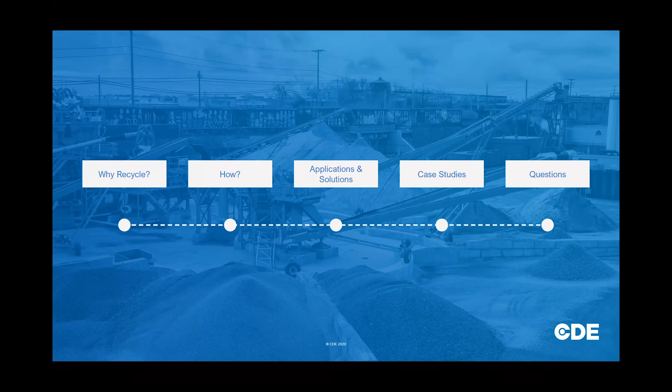So how can we turn this waste into a resource? We need to collect it in a proper way, process it in a proper way, and then serve the industry, which is the construction and building industry at the end of the day. So we need to develop a circular economy model, in which we collect the waste, process it, and it can be reused for construction and building purposes.

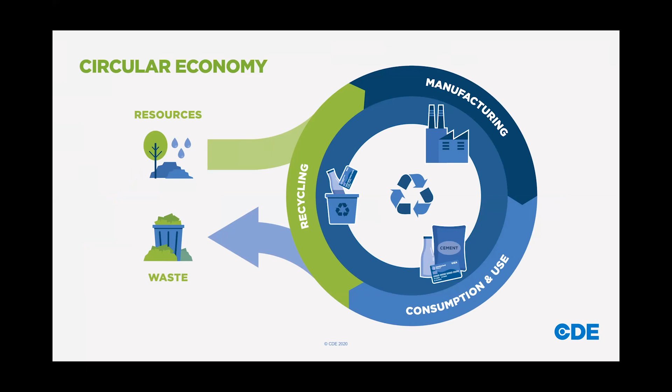I want to give you some information regarding the sand consumption level of the Earth. 50 billion tons of sand is used every year. That's a very high number, and sand can be considered the main raw material for construction purposes. Projections for 2060 show it can reach up to 83 billion tons per year, approximately 60–70% more than at the moment. So that's a big consumption level.

I also wanted to show you some photographs, because most of you in your daily life come across these kinds of piles, especially on the roads or the outskirts of cities. Usually this waste material consists of soil, concrete, pebbles, or plastics, wood, chips, this kind of stuff. But this material is very good for construction and building purposes again, after processing it in a proper way. So it can be literally everything.

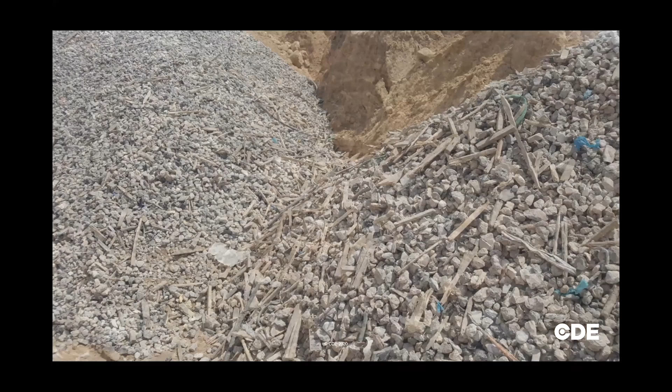Another number, just to show you the importance of sand: illegal sand extraction or illegal sand mining is number 3 on the transnational crime list, only after drug trafficking. And the market is worth approximately $200 billion.

This graph tells us that we have a lot to do in terms of recycling aggregates and sand, because the recycling ratio of the countries, as you can see, is not more than 10%, and we can do something to improve this number, of course. That's a very low value at the moment.

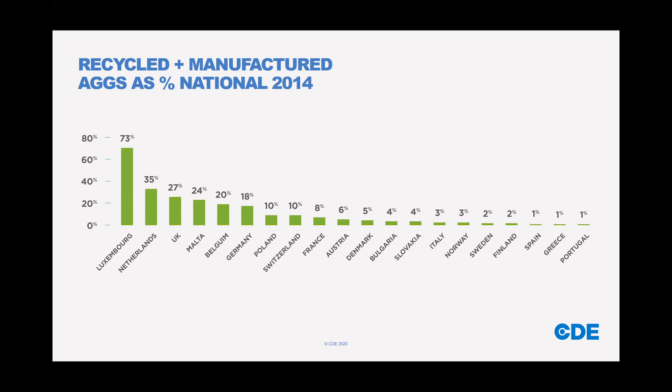So how can we recycle? There are some unique challenges which can be considered as unique opportunities at the moment. First of all, there are rigorous standards for construction materials nowadays, and they are increasing day by day. Even if you are producing virgin materials from the quarries, it can be out of spec. In most countries, there is sometimes a shortage of sand or aggregate. So diminishing resources is going to be the next challenge.

And byproducts and unusable materials are another challenge. Limited access to water, especially for Middle East countries, is another challenge. And remote locations are another challenge. When we say remote locations, for example, most of the ready mix or concrete is being used in the cities, in the construction works ongoing in the cities, of course. But when you consider the quarries, they are usually far away from the point of consumption. And this brings us another concern, like transportation cost, of course. And energy efficiency is always a concern.

As usual, there is a traditional way of processing this construction and demolition waste. We call it C&D waste. And when you use the traditional way, it is going to give you a low value and low standard product at the end of the day, which means you will lower the brand value of the recycled aggregate, you will lower the consumer or client perception, and you will lower the attractiveness of the recycled aggregate business.

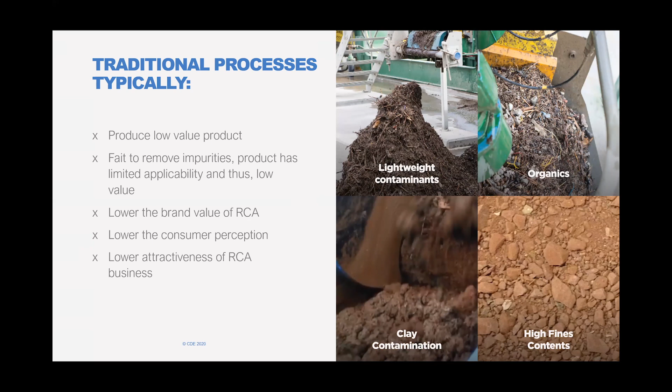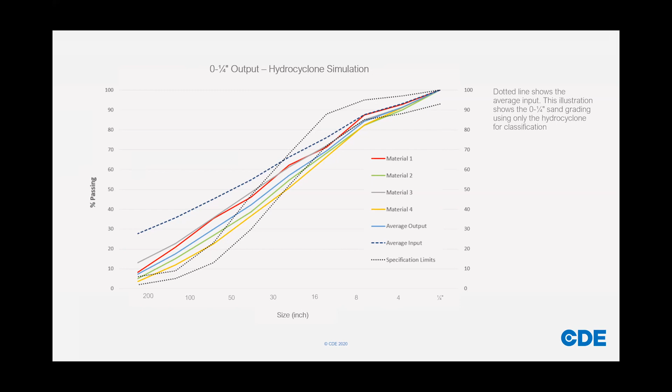The dotted lines illustrate the maximum and minimum allowable limits for construction material to be used in ready mix applications. As you can see, our examples selected here are out of spec at the moment. To get them into spec, we need to play with the physical characteristics of the materials, like proper sizing and proper classification methods, which need to be done by cyclones, some CFCU technologies, or scrubbing applications. After processing, we can get them into spec, of course.

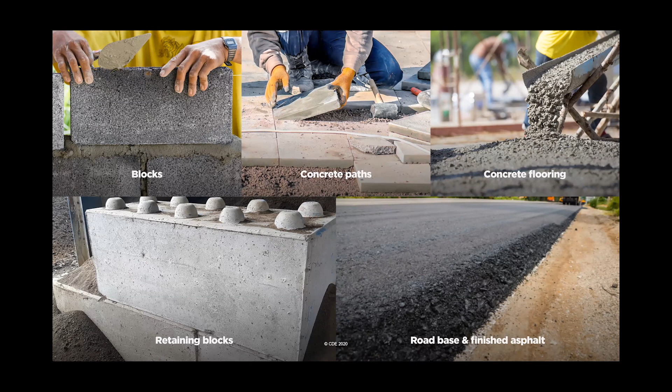So, applications and solutions. There is a nice figure here which I want to mention. 75% of the concrete being used in the world at the moment is non-structural. And most importantly, 50% of it is less than 3,500 PSI. So there is usually no need for high quality virgin aggregate in these applications. So what can we do with recycled aggregates? We can manufacture blocks. We can use it in concrete paths, concrete flooring, retaining blocks, some road base and asphalt applications, sometimes pipe bedding, or as drainage stone, of course.

There is a nice example in the UK which our company has accomplished, Sheehan's plant. Sheehan's is very close to Oxford, and they are achieving 1,890 PSI strength with recycled aggregates from the CDE plant. But the UK building block strength requirement is only approximately 1,000 PSI. So they're already exceeding the requirement by 80 to 90% at the moment. And their block production facility follows a CE certified process.

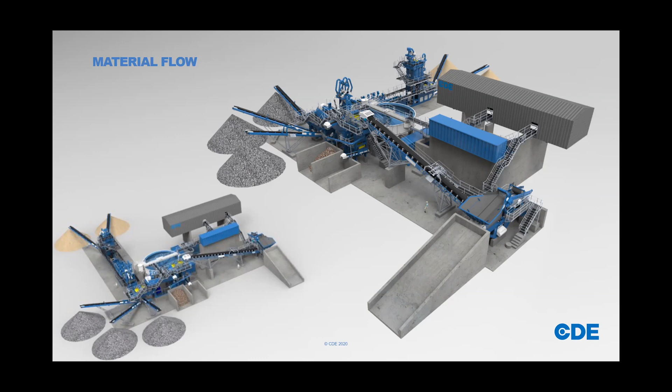So this is the core of the plant, which is a log washer. We call it AggMax. Its duty is to size and de-agglomerate highly organic contamination or clay lumps in the product or in the raw feed.

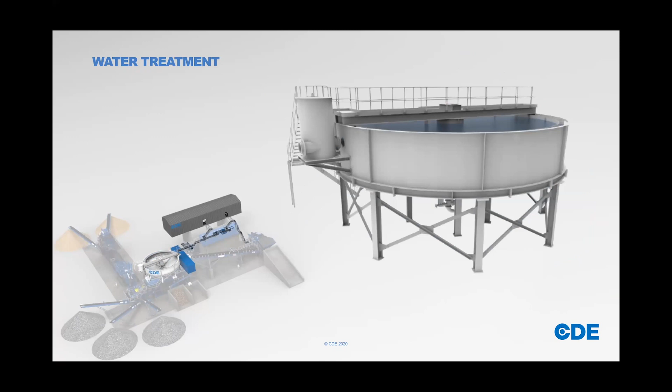Then the attrition cells or CFCU technology can also be integrated into the total process to get a better, high quality product. CFCU technology is a kind of upward current water process, and it is to remove the lightweight plastics or organics, lightweight material usually, and then you will have a high quality product at the end. The water treatment plant helps us to recycle and reuse the total water being used in the process, as I explained before.

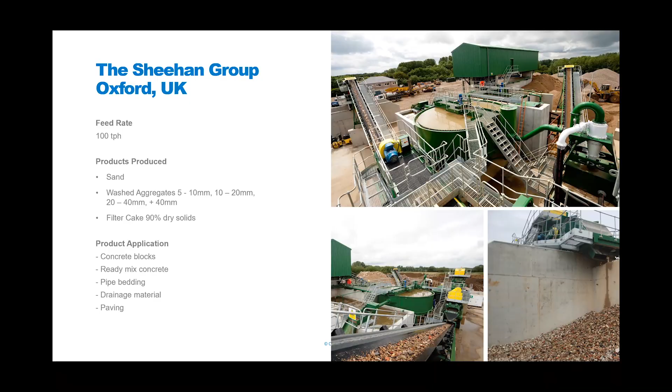So I want to show you some case studies, and there will be some short videos again. I may jump only one of them, but the videos are usually self-explanatory. The Sheehan's group, as we referred to in the presentation two or three pages back, and this is the plant. The capacity of the plant is approximately 100 tons per hour at the moment, and they are manufacturing sand and aggregate fractions as listed over here. And there is a nice video explaining it. Let's play it.

Thank you for your presentation, Anders Özel. Do you have any questions? Yeah, sorry. Our Lunguleasa and Spirchez is not here now, so we can continue with Asan. Hello to everyone. I can't hear your voice. Hello. Yes. Your presentation is finished? The presentation is almost finished, but there are only three case studies. That's all. Okay, thank you. If you want to jump to the question section, I'm okay with it. No problem. Would you like me to play the video or not? Can you see the video when I play it? Okay, I see. You can play. Okay, then let me give the examples to you instead of playing the video.

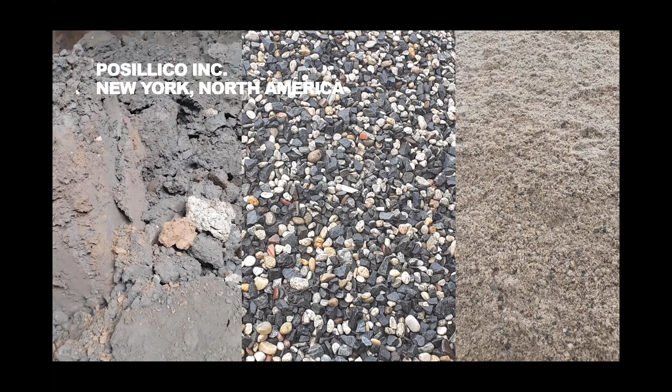So on the left-hand side, this material is from America. You can see the excavation waste coming most of the time from tunneling applications in New York. And in the middle and on the right-hand side, you can see the products. And there is a huge difference, of course. So that's the plant which is doing the job at the moment in New York, and they're manufacturing 270 tons per hour and producing 3 types of aggregates plus 1 grade of sand.

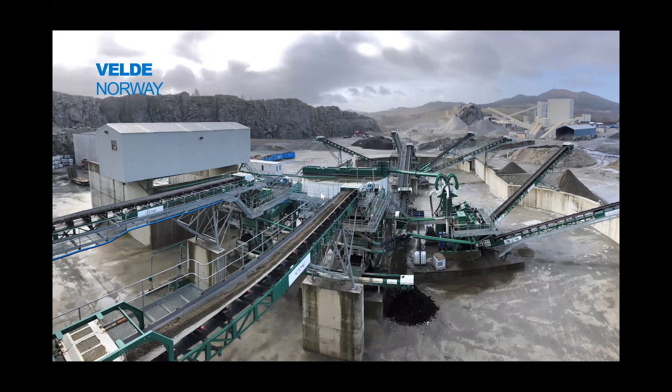Jumping the video again, and this is the Velde, Norway plant. This is the biggest C&D waste plant in the world, and its capacity is reaching up to 300 tons per hour. And again, manufacturing 4 types of aggregates and 2 grades of sands. So let's play this video at least, and then it will be finished, okay? Okay.

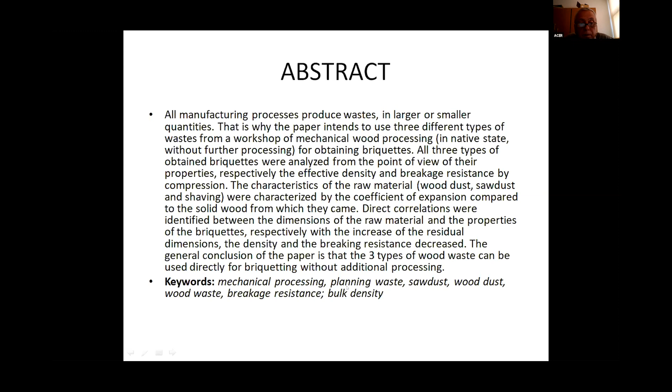As an introduction about biomass, biomass is a renewable energy source because it never ends if the processes are sustainable. In this sense, in favorable conditions, a new tree will grow, other garbage will always be obtained, and waste will be present at any raw material processing.

There are 5 different types of biomass: wood and agricultural products, solid waste of garbage, landfill gas, biogas, ethanol, and biodiesel. Among wood products, we can mention firewood, chopped wood chips, bark, sawdust, dust in native form or processed.

In the same chapter, we have a balance of wood material and waste from a furniture factory. We can see that in this factory you can use spruce timber, beech timber, plywood, chipboard, veneer for exterior, veneer for interior, timber for packing, and so on, with some quantity.

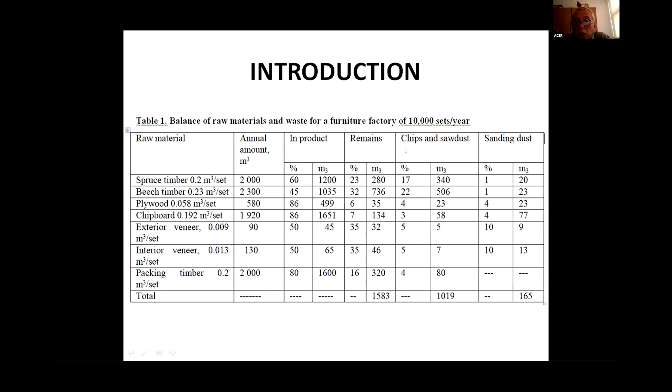A part of this raw material is retained inside the furniture product, and the rest is in the form of remains or waste with different quantities, small or large chops, chips, sawdust and sanding dust.

Some references about wood waste. The waste was evaluated by some authors, who explained that during wood processing about 7 to 50% of the wooden raw material becomes residue, but the cost of this waste valorization represents only up to 8% of the turnover.

Another author discussed the environmental aspect of using this renewable and biodegradable wooden material. They want to find alternative sources of secondary wood waste in order to use them in wood composites. Other authors use the wood waste for obtaining electricity or heat for drying lumber.

This kind of waste is used simply or in cogeneration with coal for a more attractive economical option. Other authors estimate the capacity of the wood material that can be used, starting from the point that wood waste remains a heavily undervalued resource over the earth.

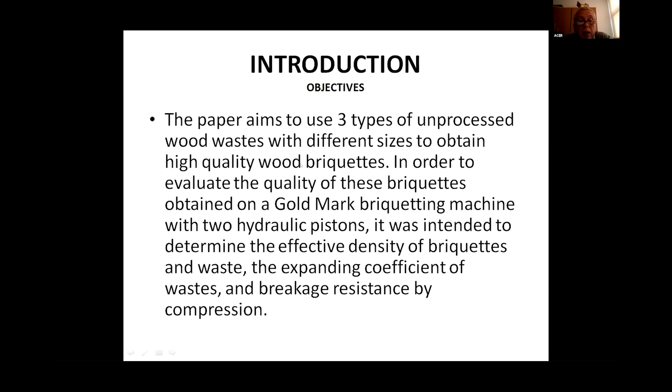Lykidis and Grigoriou analyzed the reuse of particle board waste from furniture and construction wooden items. They used four different hydrothermal treatments. The objective of this paper is to use three different wastes from wood processing for obtaining valuable briquettes with high added value.

Material and method. This waste was taken in the form of chips from planing, sawdust from wood splitting, and dust from sanding processing. There are two species, beech and spruce waste, in equal proportion, respectively 50% beech and 50% spruce.

In order to evaluate the raw material, their degree of expansion was used, as we see in the next slide. In order to obtain the expanding degree of the wood material, a graduated cylindrical vessel was used in which the material was arranged. 10 samples of each type of material were considered because there are many influencing factors of this coefficient.

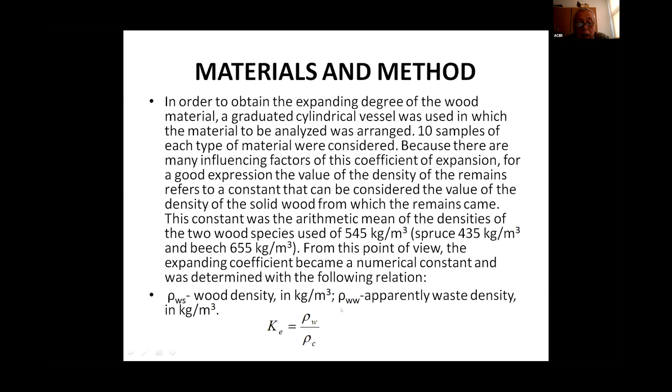For a good expression of this value, the density of the waste is related to a constant considered the medium value of the wood that enters in this recipe. This constant was the arithmetic mean of the density of the two wood species and was 545 kilos per cubic meter. From this point of view, the expansion coefficient becomes a numerical constant and was determined with the following relation: the ratio between the density of the waste and the density of the wood used to obtain this waste.

In another aspect, we use a Gold Mark machine for obtaining briquettes that have a diameter of 40 millimeters and different lengths between 10 and 32 millimeters. They used the effective density and the resistance to breaking through compression of 20 samples, according to methodology for this combustible product.

The sketch of this machine is presented below, and we can see two pistons; it is a hydraulic machine, and in this channel it obtains different lengths of briquette. Briquettes are presented in the right photo with the material nearby.

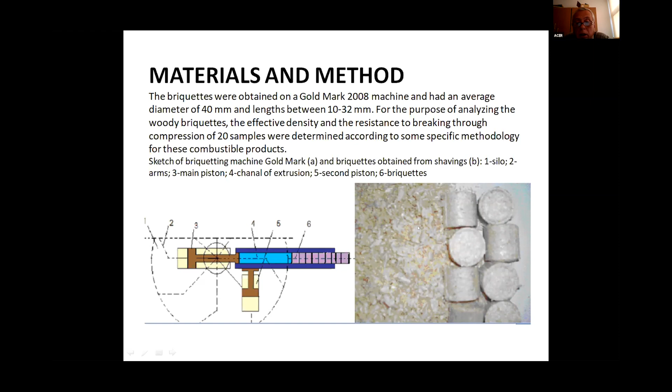Some results and discussion about this briquette. Average value of density is 723 kilos per cubic meter in the case of planing wastes, higher in the case of sawdust, and 927 kilos per cubic meter in the case of dust waste.

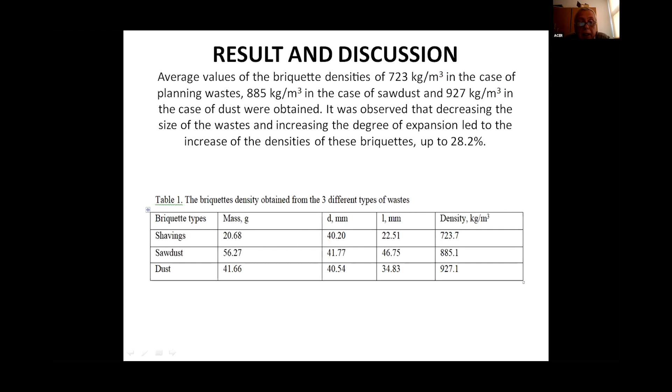Relating to the breakage resistance of briquette by compression, these were depending on the type of waste, being only 0.76 Newton per square millimeter in the case of planing waste, 1.1 Newton per square millimeter in the case of circular sawdust, and higher, 1.77 Newton per square millimeter, in the case of wood dust.

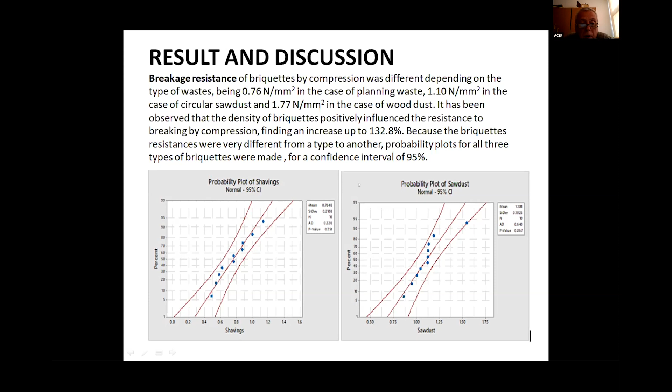Regarding the quality of the briquette, we see that all these briquettes are good from the point of density and from the point of resistance, and can be used without processing this waste.

Conclusion. In concordance with the stipulated objective, it was clearly demonstrated that there is no problem of making briquette without other additional processing of the raw waste. The wood residue obtained from different technological operations of wood processing can be used directly for briquetting.

The briquettes obtained on the gold mark machine of briquetting have a lower density than those made with other types of briquetting presses, with helical screw or with the crank connecting rod, but sufficient to exceed the limiting value of the European norm.

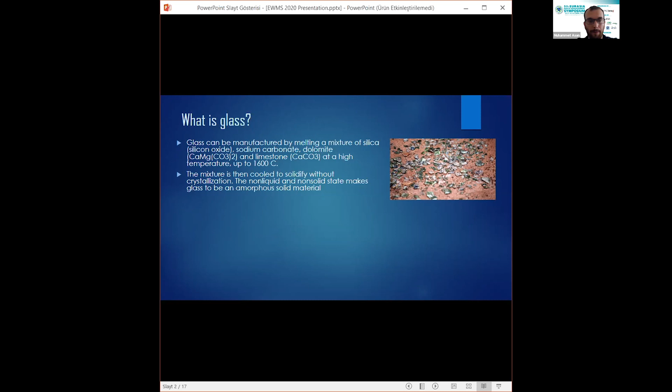If we talk about the production of glass, I'm not going to talk about the process, just the needed materials and consumption of energy. For the production of 1 kilogram of glass, 1.2 to 1.7 kilogram of raw materials are needed. The required amount of raw material depends on the type of glass.

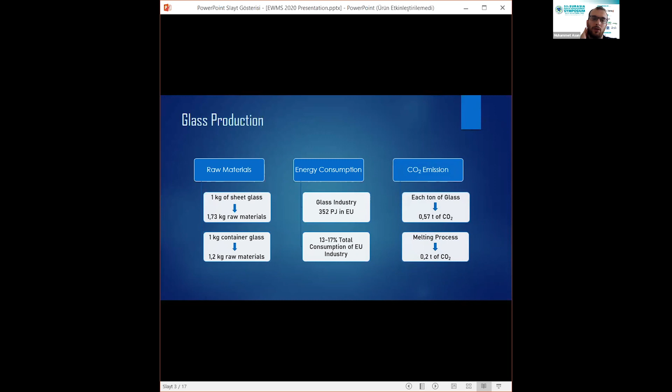The glass industry in Europe consumes 352 petajoules of energy annually, equal to approximately 15% of EU industry's total energy consumption. Each ton of glass produced causes

570 kilograms of carbon dioxide emissions. If we talk about the pros and cons of recycling waste glass, theoretically glass is 100% recyclable and can be recycled endlessly without loss in quality and purity. Recycled glass can be substituted for up to 95% of raw materials. Energy costs drop about 2 to 3% for every

10% cullet in the manufacturing process. And 1 ton of carbon dioxide is reduced for every 6 tons of recycled container glass used in the manufacturing process. But recycling of waste glass has limited scope, such as some kinds of glasses, such as windows, ovenware, Pyrex, etc., which are manufactured through a different process. If these materials are introduced into the glass container manufacturing process, they can cause production problems. On the other hand, furnace-ready cullet must also be free of contaminants such as metals, ceramics, gravel, stones, etc.

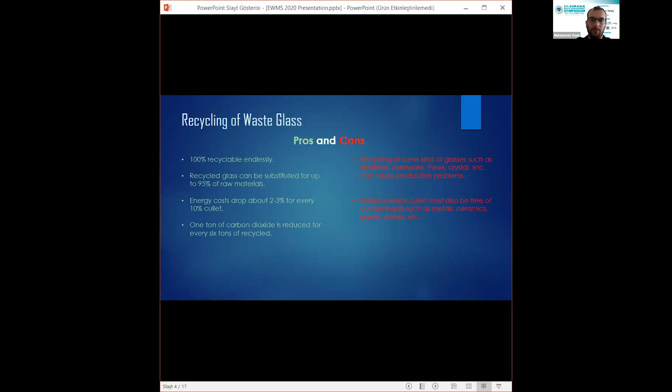In the USA, around 11.5 million tons of glass were produced. This amount equals approximately 4.2% of the total municipal waste of the United States. 30% of the waste glass was recycled, but 60% was disposed via landfill.

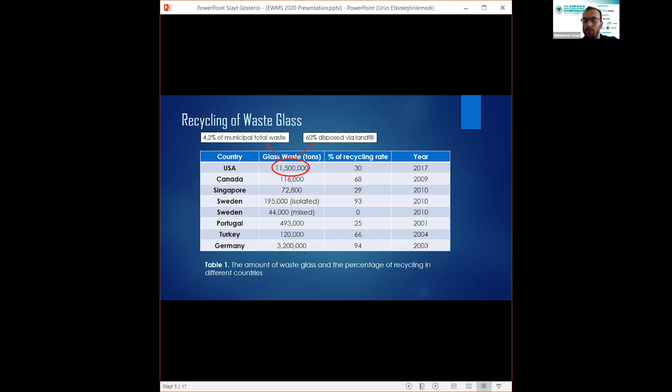Glass production consumes raw material and energy and also causes carbon dioxide emission. Using recyclable glass in concrete can be more environmentally and economically beneficial. Let's talk about it. We can use waste glass in concrete in 3 types: can be mixed in concrete for partial replacement of coarse aggregate, fine aggregate, or cement.

Using waste glass for partial replacement of coarse aggregate was studied decades ago in the 1970s. Even if it has some benefits such as reducing unit weight of concrete, there are some concerns about its sensitivity to alkali silica reaction. What is alkali silica reaction? Alkali silica reaction causes cracks upon expansion. These cracks look like honeycomb on the surface of concrete, and alkali silica reaction weakens the concrete and shortens its

service life. Usually, partial use of waste glass instead of sand contributes to alkali silica reaction expansion, but alkali silica reaction expansion decreases as the content of and maximum grain size of glass decreases. But the subject of this study is using waste glass as supplementary cementitious material.

At this point, it's necessary to define a term, pozzolan, because if we want to use waste glass as a supplementary cementitious material, it should cause a pozzolanic reaction. What is pozzolan? Pozzolan is, the origin of this word coming from the city of Italy, and pozzolan is a siliceous or aluminous material which in itself possesses little or no cementitious value, but will in finely divided form and in the presence of water chemically react with calcium hydroxide to form compounds possessing hydraulic cementitious properties.

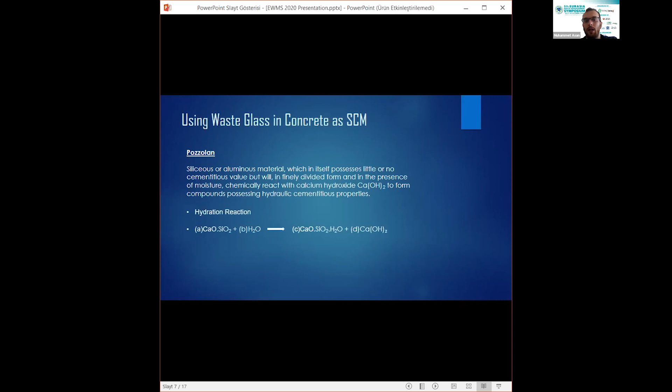To understand the pozzolanic reaction, we should first look at the hydration of the cement. During the hydration of cement, the calcium silicate components react with water and produce 2 products. One of them is calcium silicate hydrate gel. This gel allows the concrete to gain hardness and its mechanical and durability properties. The other one is calcium hydroxide.

Traditionally, it's called slaked lime. Slaked lime is not required for concrete. Even when it comes into contact with water, it dissolves, causing voids in the concrete. It shortens the service life of concrete.

Pozzolans are important at this point because the silica in the pozzolans reacts with the slaked lime to form calcium silicate hydrate gel, which provides the development of mechanical and durability properties of concrete. We know that glass has high silica content, so if you use waste glass in powder form, it can cause pozzolanic reaction in concrete.

In some studies, it has been observed that glass has a pozzolanic effect on concrete, but I'm not going to talk about the other research because my time is limited.

Although, on the other hand, using waste glass in concrete as a supplementary cementitious material has a lot of advantages. If glass powder shows pozzolanic activity enough, it can improve the durability properties of the concrete. Using glass powder as supplementary cementitious material in concrete can enable production of cheaper concrete and a cleaner environment.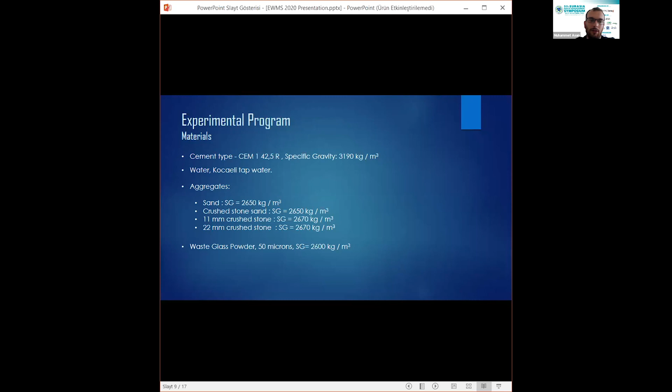I'm going to talk about these results. Waste glass powder was used at 10, 20, and 30% cement replacement ratios by mass. The water cement ratio was constant in all mixtures at 0.55. Three cubes of 150 millimeters for compressive strength testing and 6 cylinders of 100 by 200 millimeters for splitting tensile strength testing were cast for each concrete mixture. Demolding was performed after 48 hours, then the specimens were subjected to moist curing in lime saturated water at 22 degrees centigrade until testing.

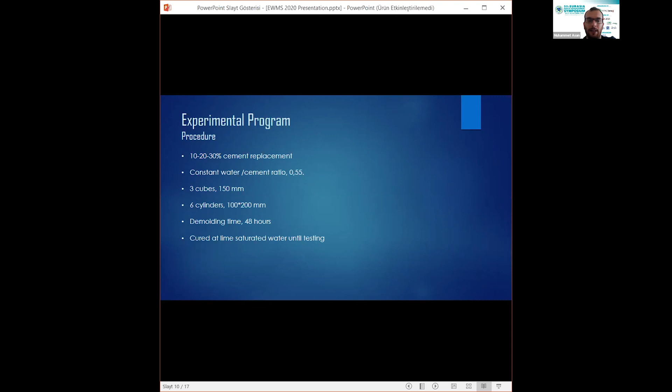We implemented a slump test of fresh concrete to evaluate the workability of concrete and a unit weight test.

Sorry, Mr. Asan, you can pass quickly, we have not enough time, we have three presenters. Okay, sorry. I can start with the results. Okay, thank you.

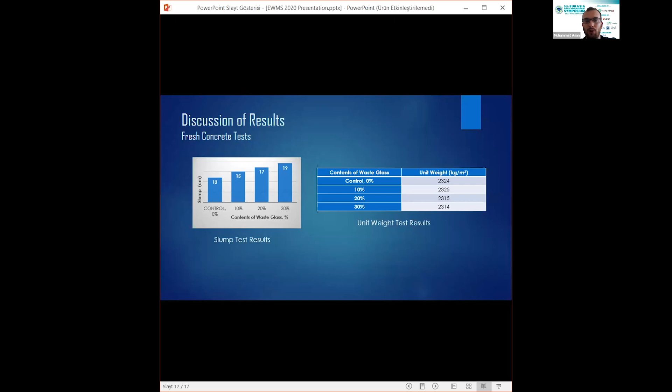The results showed that the slump increases significantly as a function of cement replacement ratio by the waste glass powder. Compared to the control sample, slump increased by 22. I am passing this part because I have to be fast. The unit weight of fresh concrete is given in the table. Although the unit weight values are close to each other, it has been observed that the unit weight decreases as the amount of waste glass increases.

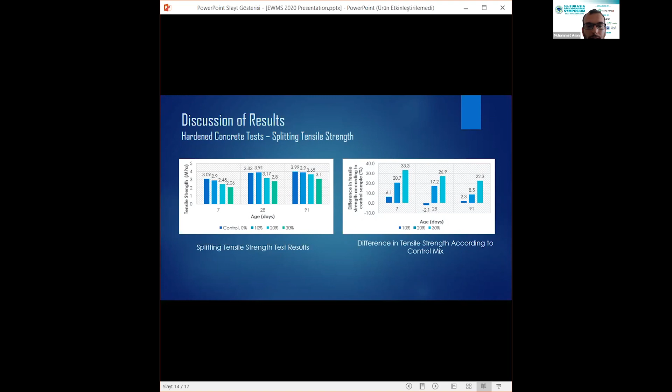The tensile strength of samples behaved similar to the compressive strength. At the end of 7 days, the tensile strength loss of concrete containing 10% glass powder compared to the control samples was 6%, while at the end of 91 days, the difference was reduced to 2%.

Conclusions: using glass powder as a supplementary cementitious material in concrete increased the slump volume of concrete. Since the unit weight of glass powder is lower than cement, using glass powder reduced the unit weight of concrete. Although the compressive and tensile strength of samples containing glass powder are lower than the control samples, the difference between them decreased over time.

Using glass powder delayed the concrete gaining its strength. It was observed that the number of unbroken aggregates on the fracture surface increased as the amount of glass powder increased. The results of the present study emphasize the potential of waste glass powder as a cementitious material. The cement replacement ratio of 10% seemed to be a limit value beyond which the strength reduced dramatically. On the other hand, there was a significant recovery at later curing periods.

Thank you for your attention. If you want, you can reach me via this email address.

Thank you for your presentation, dear Asan. Do you have any questions? Okay, it was really fast. I hope you could understand. I can explain our research further. Okay, thank you so much for your attention.

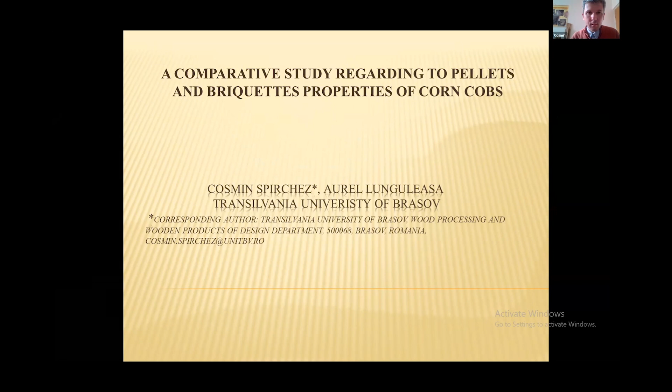The title of the paper is about corn cobs. The authors are Cosmin Spîrchez and my colleague Aurel Lunguleasa, Transilvania University of Brașov. Biomass is a renewable energy source by means of the fact that it grows year after year. It is widely spread throughout the world and it has low cost compared to fossil fuel.

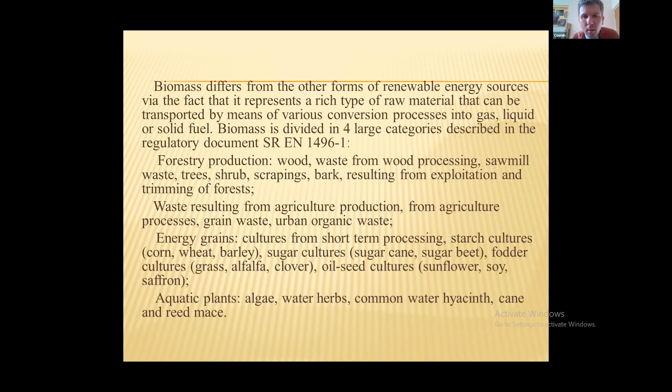Biomass resources from which combustion material is produced can include waste resulting from the production of agricultural grains, municipal waste, and residual waste. Biomass differs from the other forms of renewable energy sources via the fact that it represents a rich type of raw material that can be transformed by means of various conversion processes into gas or solid fuel. Waste resulting from agricultural production, from agricultural processes, grain waste, and urban organic waste.

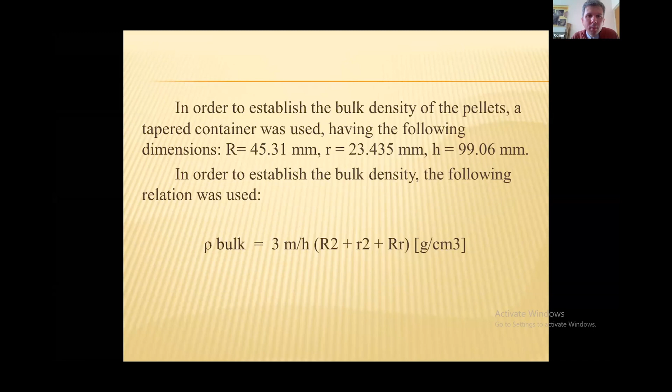Material and method: the actual density has been established according to standard EN 15103. In order to establish the actual density of the pellets and briquettes made from corn cobs, 20 pieces of each were taken into consideration. In order to establish the effective densities, the following relation was used, presented in the figure. In order to establish the bulk density of the pellets, a container was used having the following dimensions.

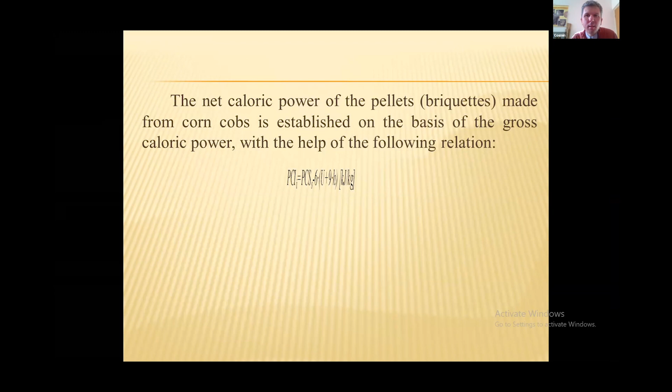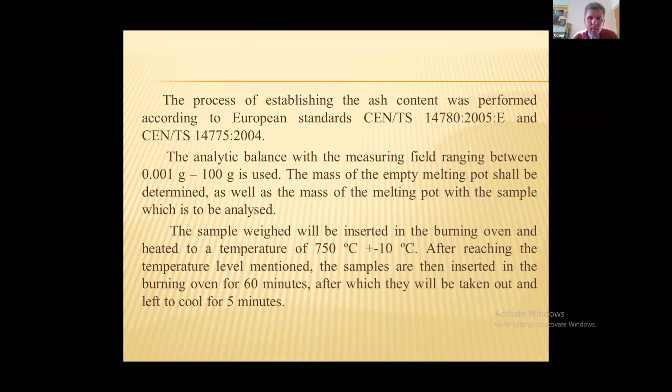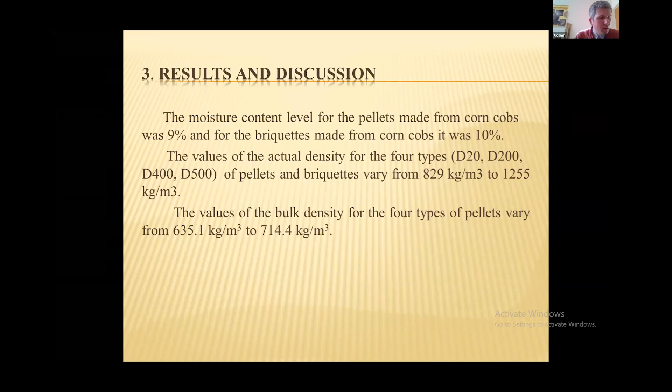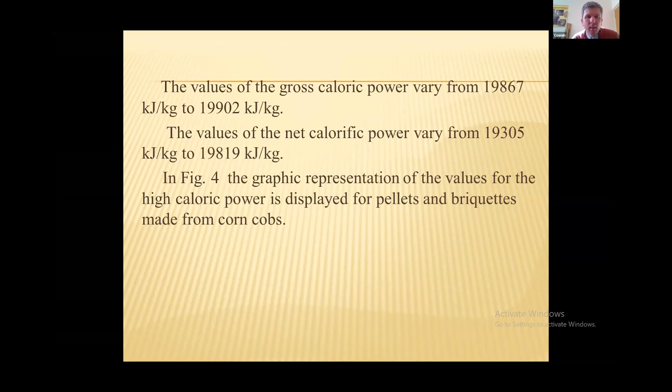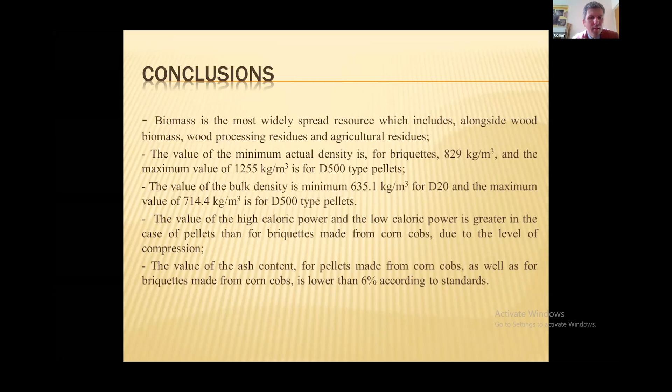In conclusion, biomass is the most widely spread resource, which includes wood processing residue and agricultural residues. The minimum actual density value, 829, is for briquettes; the maximum value of 1,255 is for the D500 type pellets. The value of the high caloric power and the low caloric power is greater in the case of pellets than for briquettes made from corn cobs due to the level of compression. The value of the ash content for pellets as well as briquettes made from corn cobs is lower than 6% according to standards. Thank you for your attention.

And thank you, dear Spirchez. Do you have any questions? Thank you.

Thank you. Thank you. The next presenter is Levent Köroğlu. Köroğlu will present the work titled Valorization of Heat-Treated Boron Derivative Waste with Different Particle Sizes as Portland Cement Replacements. Can you introduce yourself before starting, dear Köroğlu? Okay, now I'm sharing the screen. So, okay, hello everyone.

I hope you are healthy. I'm Levent Köroğlu. I am a research assistant and also a PhD student at the Department of Material Science and Engineering in Eskişehir Technical University. I work with Dr. Derya Över Kaman and Dr. Erhan Ayaz. So, as you said, we focused on the valorization of heat-treated boron derivative wastes with different particle sizes as Portland cement replacements. So, I would like to briefly mention the strength mechanism of cement mortar.

As you know, cement mortars gain strength by the hydration of the cementitious materials. There is an interfacial transition zone between the aggregate and bulk cement paste, so that following the hydration, some hydrated products fill in this zone, and the main hydration products are calcium silicate hydrate, calcium hydroxide, and ettringite. Now you can see the main formation reactions for the hydration of silicates and aluminates in cement. As you see, calcium silicate hydrate, calcium hydroxide, called Portlandite, and also ettringite are formed in the structure.

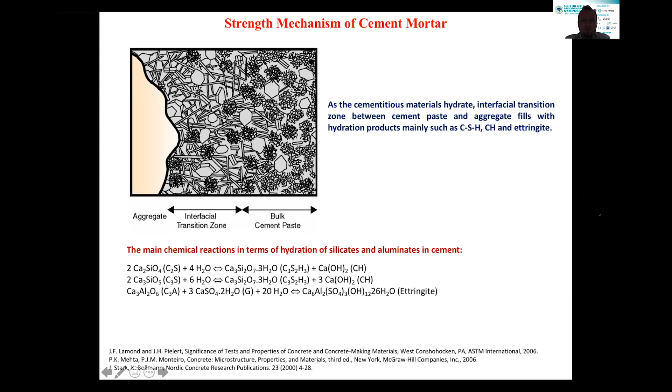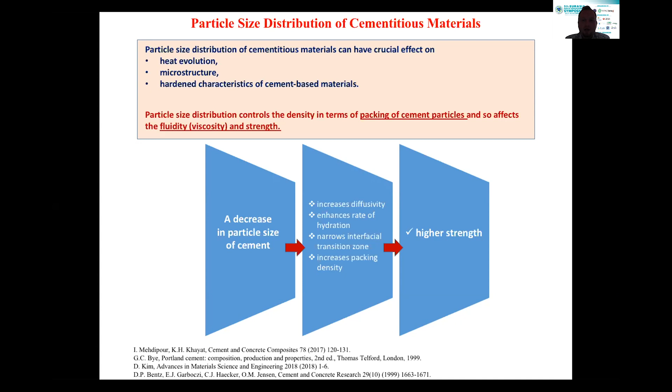So what's the importance of the particle size distribution of cementitious materials? Particle size distribution has an effect on the heat evolution, microstructure, and hardened characteristics of cement-based materials. It controls the packing of cement particles and also affects the viscosity and strength of cement mortars. When the particle size of the cement decreases, we have higher diffusivity, a higher rate of hydration, a narrower interfacial transition zone, and increased packing density. So finally we have higher strength for the cement mortars.

I would like to mention boron reserves and boron derivative waste quickly. Turkey has 72% of the boron reserves worldwide. In Kırka, Eskişehir, a city of Turkey, the Eti Mine plant works. Approximately 900,000 tons of boron derivative waste are generated during 1 million tons of borax pentahydrate production. Borax pentahydrate is a boron mineral from boron mining and is used in many industrial sectors. The high amount of waste causes costly waste storage and, unfortunately, environmental pollution.

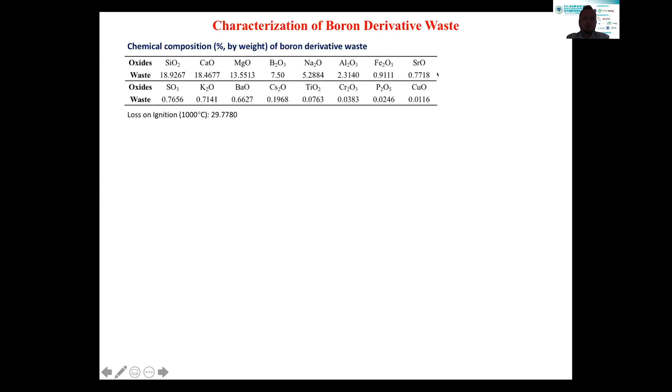So what's the boron derivative waste? Its chemical composition is mainly silicon, calcium, magnesium, boron, sodium, and aluminum, and there are also trace elements in the structure. What about the crystalline phases in the waste? According to X-ray diffraction analysis, dolomite (calcium magnesium carbonate), calcite (calcium carbonate), quartz, borax pentahydrate, and kaolinite can be found in the waste. The major phases are dolomite, calcite, and quartz. These phases include carbonates, so with heat treatment we can remove these carbonates and then provide reactions between these phases.

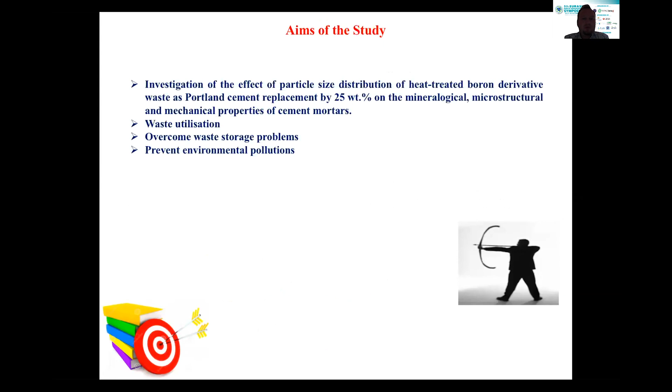The aim of the study is to investigate the effect of the particle size distribution of heat-treated boron derivative waste, as a Portland cement replacement at a stable content of 25 weight percent, on the mineralogical, microstructural, and mechanical properties of cement mortars. With waste utilization, we can overcome waste storage problems and also prevent environmental pollution.

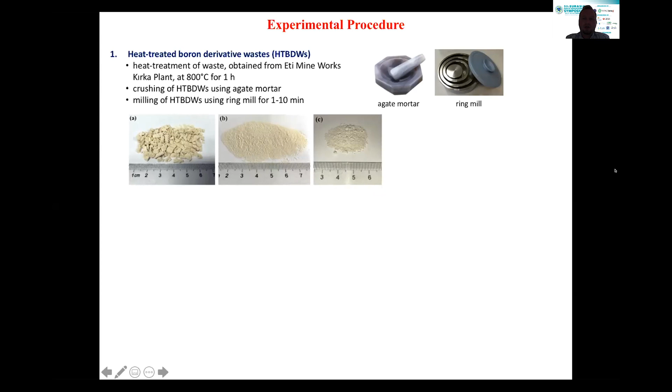Second, we prepared pastes composed of Portland cement, heat-treated derivative waste with 3 different particle size distributions, and water. We kept the waste-to-cement ratio stable at 25 weight percent, and we aged these pastes for 28 days. Thirdly, we prepared cement mortars according to the ASTM standard using Portland cement, heat-treated wastes, sand, and water. Again, these ratios were kept stable. We aged these cement mortars for 7 and 28 days.

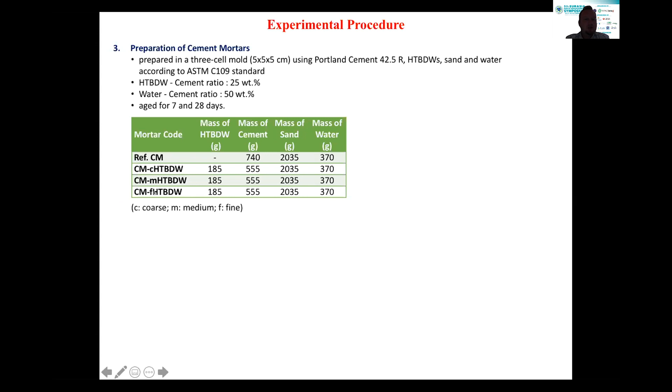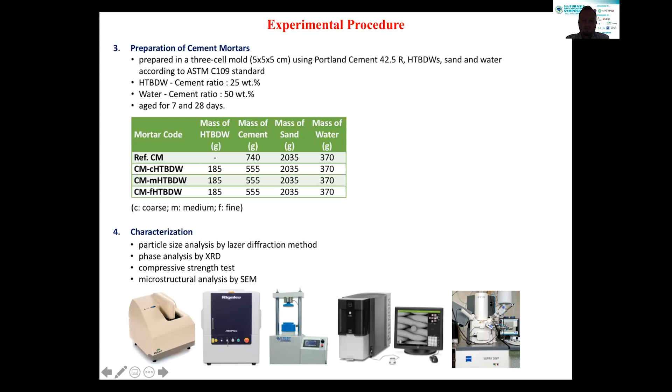The reference cement mortar didn't include heat-treated waste, and the others, according to particle size distribution, we called coarse, medium, and fine heat-treated wastes. Finally, characterization, particle size analysis, phase analysis, compressive strength tests, and microstructural analysis were performed using these devices. As you know, Portland cement includes calcium silicates, gypsum, calcium aluminate, and other mineral phases.

So what's the particle size distribution of the cement and wastes? Here the coarse heat-treated powder has a much broader particle size distribution. The medium powder has an equal median particle size compared to cement, but its particle size range is slightly broader, and the fine powder has exactly the same particle size range as cement.

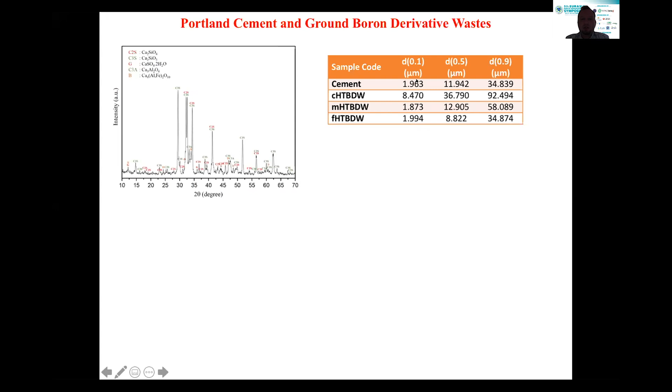So now you see the phase evolution of pastes. So on the reference paste, we observed unhydrated phases and also the major hydration products, calcium hydroxide, calcium silicate hydrate, and also a bit of ettringite phase.

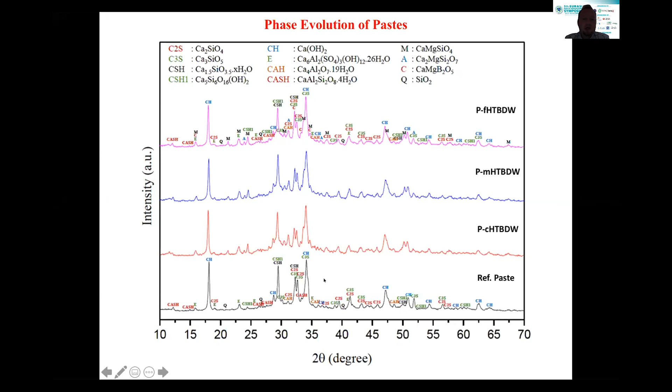So the heat-treated waste incorporated pastes have a similar XRD pattern, just a bit of difference here due to the phases coming from the heat-treated waste. After the heat treatment of waste, some calcium magnesium based phases and also quartz are formed in the structure, and we observe these phases as minor crystalline phases in the structure, but in all XRD patterns the same hydration products were detected.

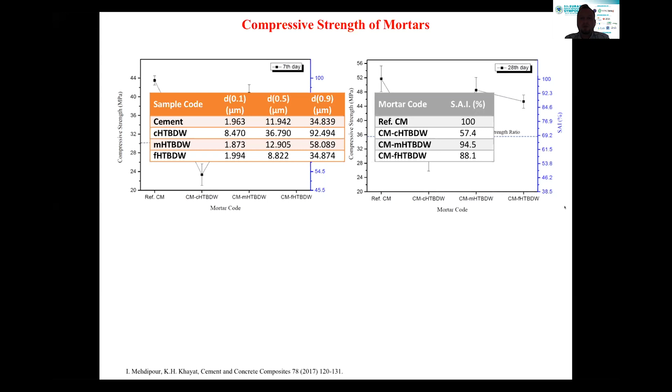It is the strength activity index. So we accept 100% for the reference cement mortar, and for coarse powder, there's a reduction of the strength, and the highest value is obtained for the medium heat-treated powder. Much broader particle size range provided quite low strength, as I said before, due to the high interparticle spacing, which needs more hydration. In terms of strength values, medium and fine powder could be used in concrete applications.

It's important that the heat-treated waste acts as a filler, but is not reactive like cement, because with the addition of the heat-treated waste powder, we have a little bit of loss in the compressive strength, even for the medium and fine powders. So with the aging time, the cement mortars get more compaction. I mean, the formation of the hydrated products leads to higher packing density in the cement mortar.

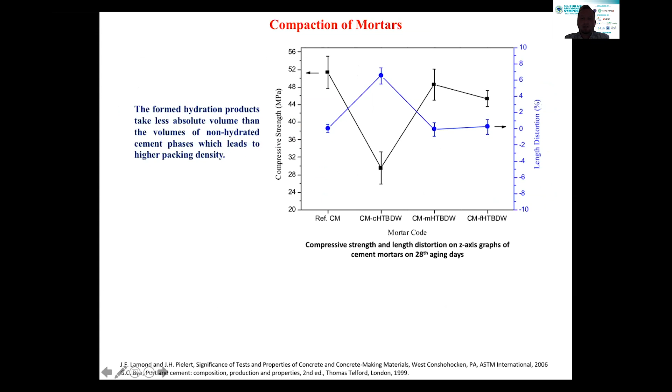So there is an opposite relationship between the compressive strength and the length distortion. We measured the length distortion of cement mortars on the z-axis after 28 aging days. Briefly, you can see the values here. There is an expansion for the coarse powder with the much broader particle size, and the reference mortar and medium waste incorporated mortar have similar length distortion. It means an equal compaction ratio, and it shows the availability for the application.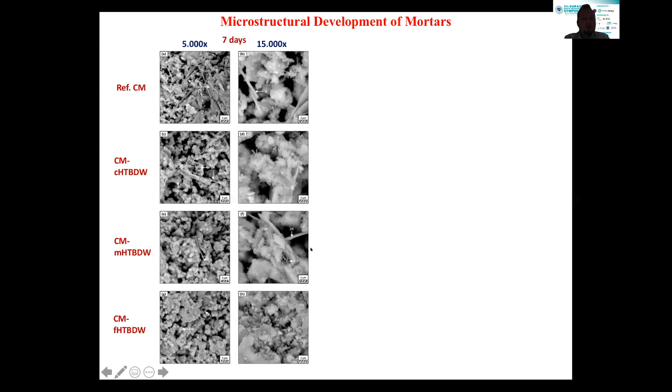So now you are seeing the SEM images after 7 days aging. All cement mortars have the same hydration products, and with the increasing of the aging time, the amount of the hydrated products increased much more. But there's a difference here. This cement mortar incorporating the coarse powder has many more voids in the structure. This also supports the length distortion data, because this cement mortar has an expansion after 28 aging days.

So as a conclusion, we investigated the effect of the particle size distribution of heat-treated boron derivative waste on the properties of cement mortars. We used it as a replacement by 25 weight percentage. We achieved heat-treated wastes with 3 different particle size distributions. According to the obtained data,

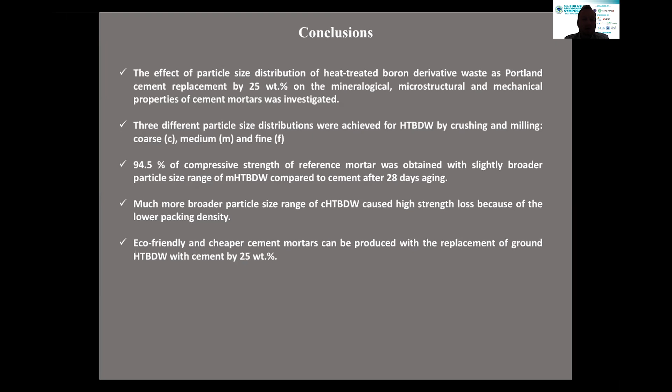94.5% of the compressive strength of the reference mortar was obtained with the slightly broader particle size range of medium heat-treated boron derivative waste. Much broader particle size caused strength loss because of the lower packing density, but it should be noticed that eco-friendly and cheaper cement mortars can be produced by replacing cement with ground heat-treated wastes by 25 weight percentage.